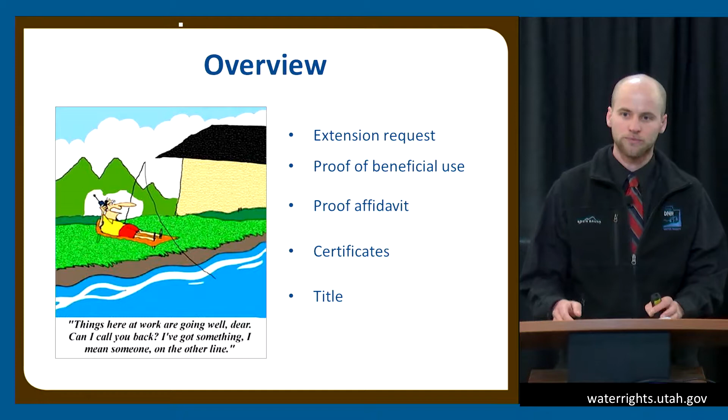So let's go ahead and get started. Just a brief overview of what I'm going to talk about. I'm going to talk about extension requests, submitting proof of beneficial use. We'll talk about proof affidavits and what they are, and then we'll go into some certificates and end with title.

All right, so yay, you have an approved application. So you're done, right? Well, no. We will put this application in a tracker, and it's up to you guys to start putting this project into place and getting this water into beneficial use. And so this tracker will notify us when your proof due date, which is delineated in your application, is coming up.

We will send you a 60-day notice. At that point, that should be a catalyst for you to say, hey, I need to do something, either submit proof or submit an extension of time. If you do neither, you are at risk of your application lapsing. A common misconception is people think, I'm putting my water to beneficial use, there's nothing else I need to do. If you ignore these notices, even if you are using that water as described in that application, it can still lapse if you don't submit proof.

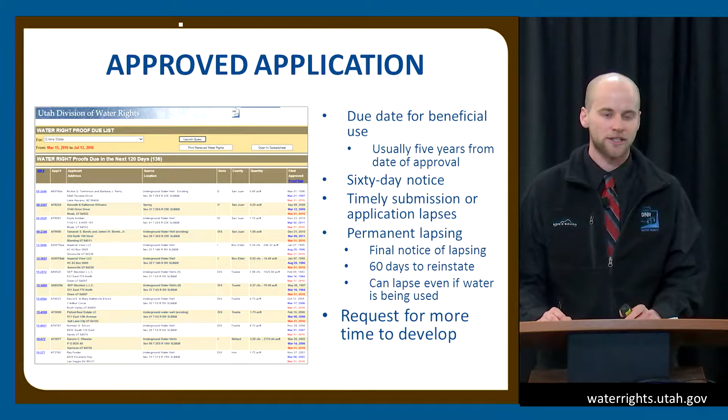And as Clark talked about, there is a reinstatement process if it does lapse, but let's just not let it get to that point. So you can file for an extension. Let's say you get that 60-day notice and you say, oh, wait, I haven't completed everything. There is an avenue for you to submit an extension.

It is important to note that you have to be diligently trying to put this to beneficial use and making progress. You can't submit an extension request and say, I've been in Hawaii for the last 5 years and I may get around to it, but give me an extension anyways. For example, if you submitted for a domestic use with irrigation and livestock, maybe it was just an empty lot and you've built a house and you're in the process of drilling a well, but you need more time. There's financial hardships. We are very reasonable people. So if you need to, submit for an extension of time. There is a form on our website and a $50 fee.

If you are at 14 years past your application being approved and you're still submitting for an extension, at this point we're going to take a more critical look at it, maybe scrutinize it a little more. There will be an additional fee if you're submitting requests out beyond 14 years, and we will also re-advertise. It is a $150 fee.

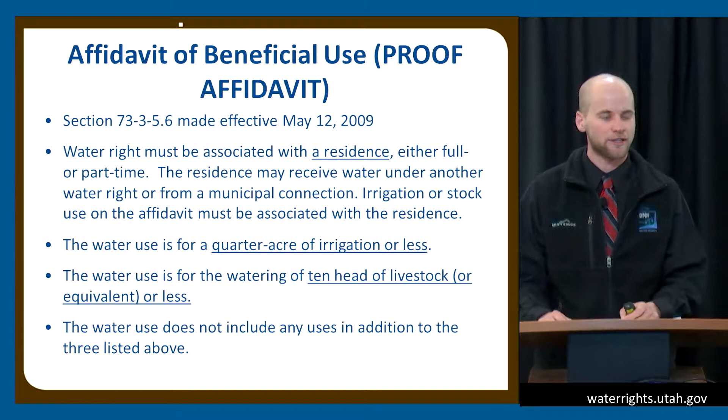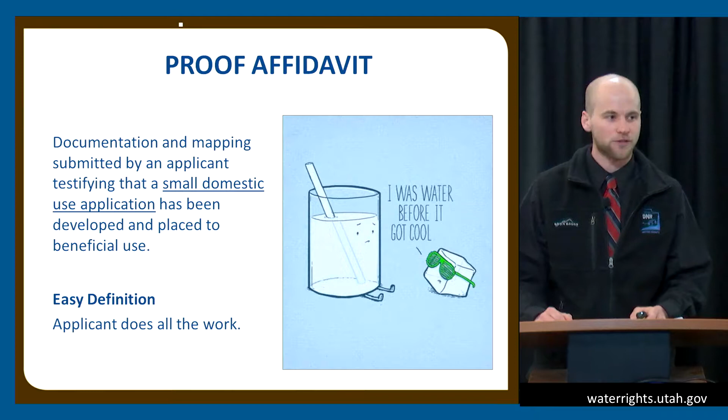And so a small filing is considered indoor domestic use, quarter acre of irrigation or less, and 10 livestock or less. We won't accept an affidavit of beneficial use on anything other than those three uses. So you can't submit for mining or industrial purposes and expect to be able to submit an affidavit of beneficial use. So in the simplest terms, an affidavit of beneficial use just allows you to submit your own proof. It eliminates the fee for hiring a proof professional, so that is great.

We do have some additional requirements, so there is that form on our website. It's called the Affidavit of Beneficial Use, found under the Forms page. We also ask that you submit a map of beneficial use, and there's an area for you to fill out the map on that form. We also ask that you obtain a plat map from the county recorders, which you should be able to get for a nominal fee. And we also ask that you submit a certificate of occupancy. And if you have trouble obtaining a certificate of occupancy, we will also allow you to submit a tax notice showing that there is a home on the notice.

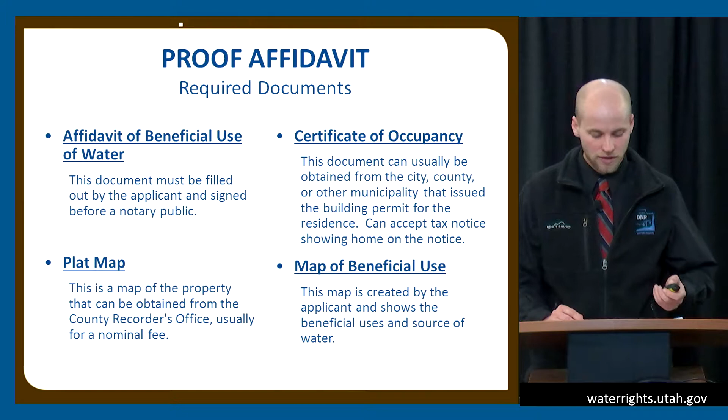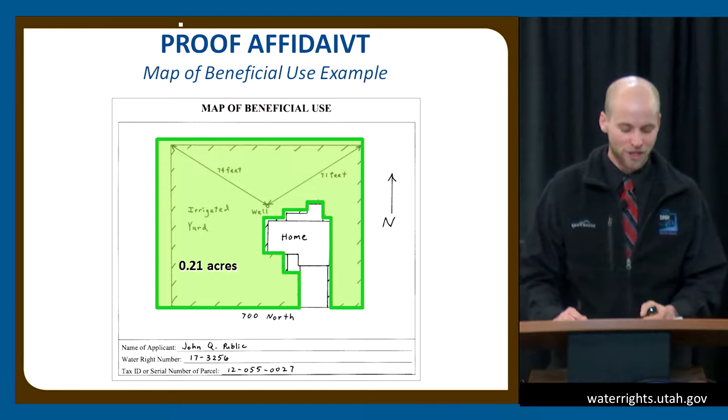And it's got the north arrow. And it's important at the bottom. It probably shouldn't have to be a reminder, but we've seen maps come in and it doesn't give a name or a water right number. So please make sure you fill that out.

Some common questions we see. Yes, if you file a proof affidavit, it will get a certificate of beneficial use, assuming everything is acceptable. We say you don't have to hire a professional, but if for whatever reason you want to, you feel more comfortable, you need that help, you're more than welcome to. And it's also important to note, as in many cases, shares of stock in an irrigation company are treated a little bit differently. In this case, if you are filing a proof affidavit, you need to make sure that the irrigation company also signs the affidavit.

All right, so you've submitted proof. The regional office has accepted it. They've looked at it. They did a field investigation or looked at aerial imagery. Things look like they're consistent.

What will happen is the Applications and Records section will receive these proofs, and they'll also come with a draft certificate, and we'll review the draft certificate, the proofs, the application, make sure everything jives, and if it all looks good, we'll issue a final certificate, and the state engineer will review and sign that, and it will be issued on the same day as it's signed, and it'll be sent out to the water user.

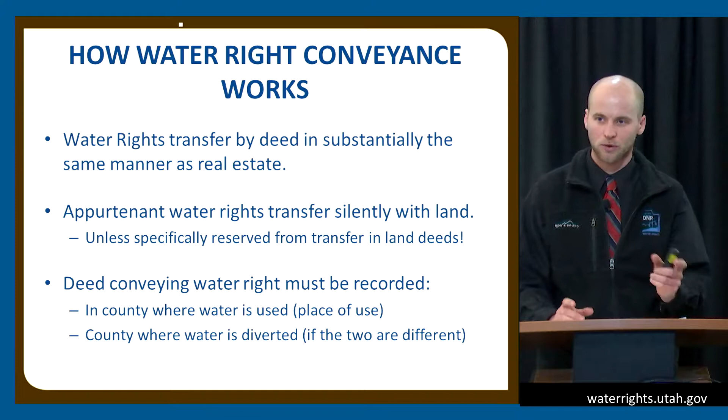We've seen in a number of cases where the point of diversion and the place of use either straddle a county line or the point of diversion takes place maybe a little bit further away from where the place of use is. So we need that recorded in both those counties if that applies to you.

So just to reiterate that fact, the county recorder is the official record keeper. They maintain all the deeds, certificates if they were recorded, which they should have been in the years past. Of course, moving forward, it is optional. They are supposed to keep an index of water deeds now, and also if you do submit an assignment, which is basically the transfer of unapproved or unperfected water rights, that needs to be recorded with the county recorder, and that form should be available on our website.

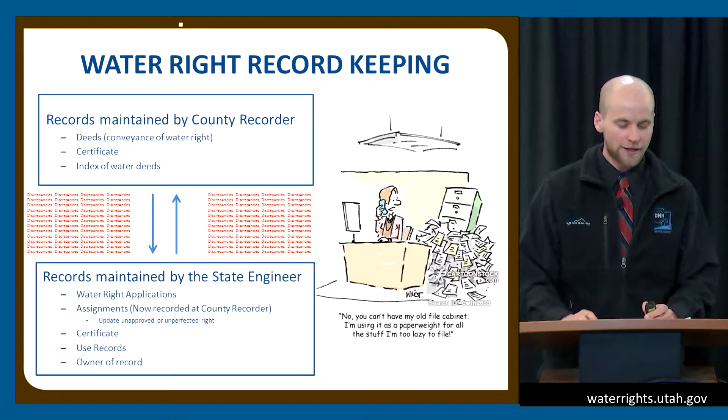Since we're not living in the ideal world, I know it's kind of hard to read, but I put a bunch of discrepancies in there. That's just discrepancies written over and over again between the county recorder and the Division of Water Rights, the two records. So how do we go about eliminating these discrepancies? What we ask you to do is to keep updated information with the Division of Water Rights. So you'll hear it multiple times throughout today. We ask that you keep a current address with us, but we also ask that you keep current ownership information with us. So how do you do that, and who can do that?

An owner is allowed to update title if the deed specifically references the water right number. Most often, you're going to need to hire a title expert, and that can be an attorney, a professional engineer, professional land surveyor, and what they're calling a title insurance producer, basically a title agent.

And kind of for the same reasons as we need an engineer or a surveyor to submit proof. This is a complex issue, and a thorough title search is necessary at the county recorder to ensure that a proper title update is done. So how do you do it?

You submit a report of conveyance, which these forms are available on our website, and it basically is telling who the current owner of the water right is. You're telling the division who it is. So on a report of conveyance, you're showing a clean chain of title from the owner of record on our website or our database to whoever the current owner is.

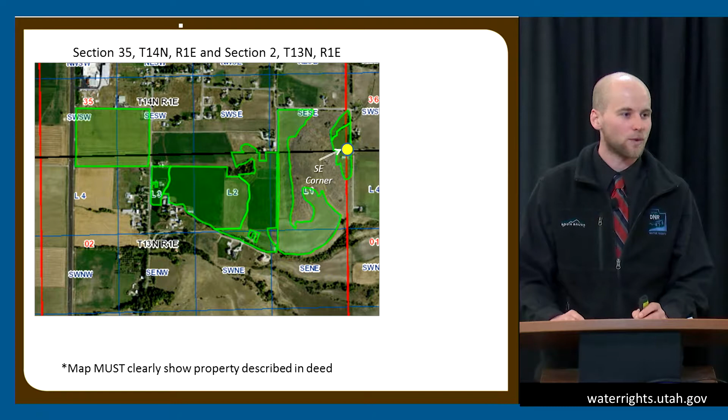So we do require that a map be submitted if you're updating by appurtenance. When you're hiring a title professional, they ought to know our mapping standards. They are on our website, so if the title professional is unaware, they should take the time to look at those. But kind of the first thing is we need a section, township, and range identifying where this location or where this update is located.

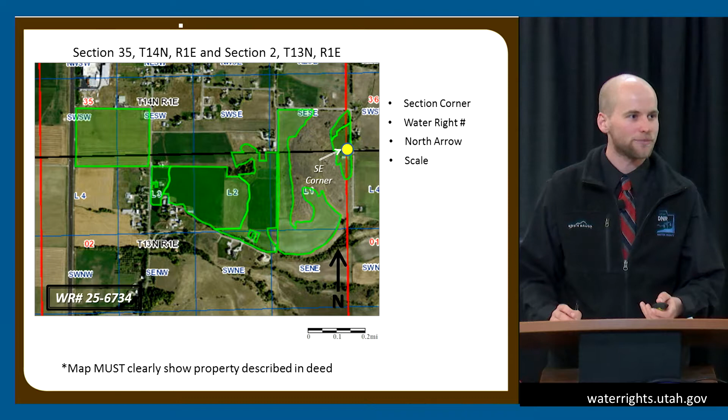We want a section corner identified. The water right numbers should be identified on the map. There should be a north arrow, a scale, and a legend. And we also require that you show us what parcel it is that you're updating on and the acreage associated with that parcel.

So I guess as a general rule, it's a professional map coming from a professional, so it ought to look professional. So if you don't look at the mapping standards, that is the one general rule I would say, that it ought to look professional. But if it doesn't meet our standards, then it will get sent back.

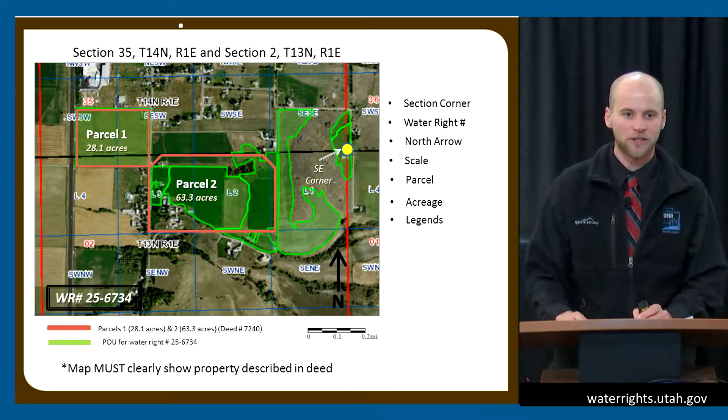So, all right, I'll talk a little bit about addendums. So what is an addendum? It's basically an attachment to a deed. And in simple terms, it's basically a simplified report of conveyance, in which a grantor and a grantee basically create dialogue about what water rights are being conveyed from the grantor to the grantee. The grantor needs to be the owner of record on our website.

And the grantor and the grantee must sign the addendum, and the grantee must have a current address and must maintain that current address with the division. So you record this addendum with the county recorder, and they are now required to send these to the Division of Water Rights, to the Office of the State Engineer. The nice thing about this is there would be no filing fee, because you're not filing, you're recording it with the county recorder, and they send it to us.

Kind of the drawback is that in the statute there is no designated time frame for when that has to be sent over. So if this is something that needs to be done in a timely fashion, we still encourage you to just submit a report of conveyance. We don't want it to sit at the county recorders and you have to keep bugging them to try and send it over. So we just encourage you, if it's a pressing matter, just go ahead and file a report of conveyance.

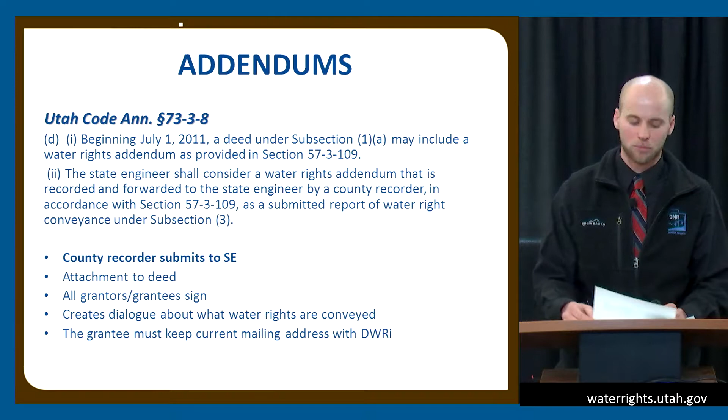So I guess if there's anything you're going to take away from the title portion of this, it's that you need to do your due diligence when you're buying or selling or updating to a water right. A lot of people like to put the blame on us. We have a great title section. Sue and Dana do a great job, and they take a lot of blame for things that they didn't do, and that's not their mistake or their problem. So make sure that you are taking the time and making sure that you understand what you are buying or updating title to.

So again, transfers by appurtenance require a map. File a report of conveyance with the division. Those forms are available on our website. And let me just make sure I covered things that were going to be in the tests.

Yep, I think we're good. So do you guys have any questions or no? Okay, great. Oh, okay. Good try there.